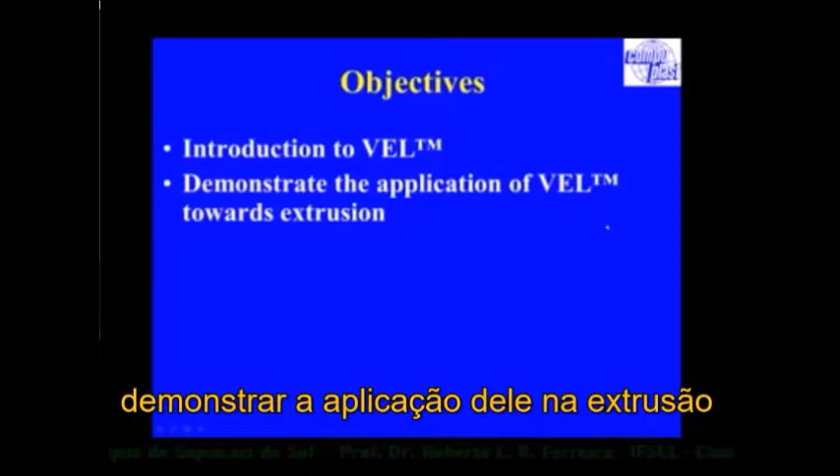This fellow here, Jerzy Wilczek, is my business partner and one of our main developers who looks after our development team over in Europe. So the objectives here are: introduction to a virtual extrusion laboratory, demonstrate the application of VEL towards extrusion, show how simulations can be used to troubleshoot and optimize an extrusion process, and explain certain observations or phenomena with the aid of simulations that would be very difficult to understand otherwise.

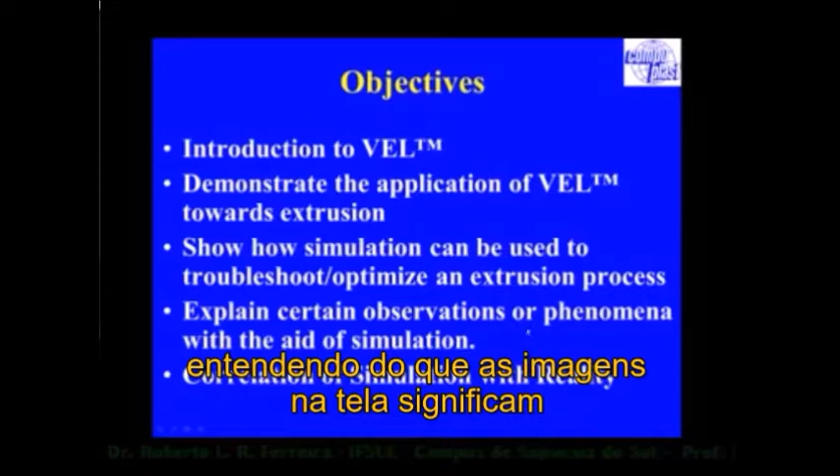And most importantly, the correlation of simulation with reality. This is the key to using simulation properly and becoming efficient, understanding what the pictures on the screen mean with respect to the reality of the process and the problem you're experiencing.

The virtual extrusion laboratory consists of these process simulations, and we have a custom one here if the particular situation doesn't apply. In reality, the virtual extrusion laboratory consists of about 12 modules, and the following parametric modules are going to be offered through Polymer Ohio. These will be the material module, which has the material database and allows users to enter material data, fit it, and use their own materials.

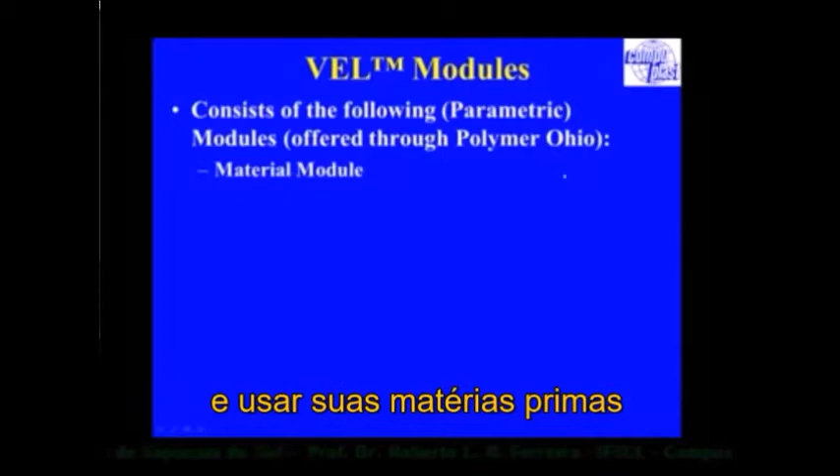The extruder module for single screw extrusion simulation, screw design and optimization. The flat die module for simulating flat or cast film dies, including feed block type co-extrusion dies. The side-fed die module, for crosshead type dies for annular coating or cable and so forth. The spiral die module, which is a spiral mandrel distributor, typically used for the blown film process, but also found success in pipe, tubing, and even blow molding.

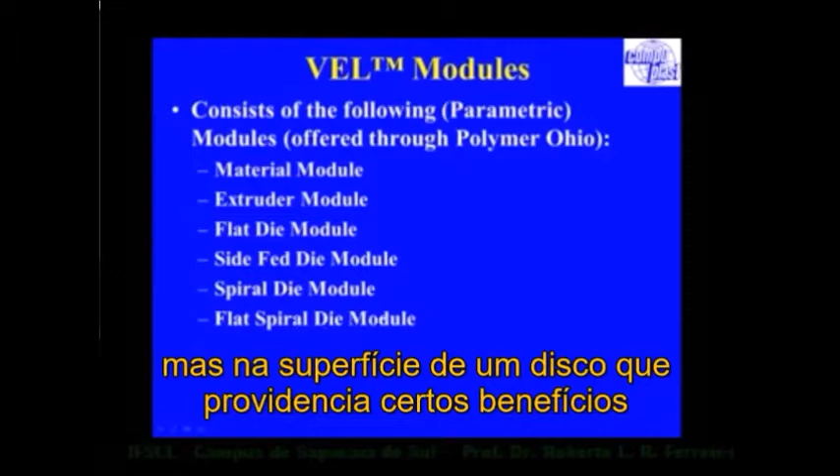And the flat spiral die module is something relatively new. It's used for distribution systems similar to the spiral die module, but on the surface of a disc, which provides certain benefits, particularly in multi-layer co-extrusion dies, over 5 layers. And of course, we have the multi-layer module, used to analyze and design co-extrusion systems where you have layers of multiple polymers.

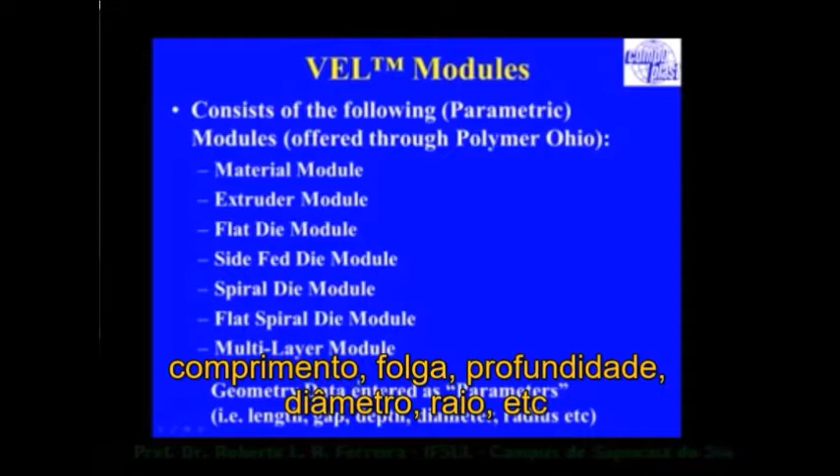These modules were selected because they are really the easiest to learn and use, since the data is entered as parameters such as length, gap, depth, diameter, radius, etc. And the calculations are mostly based on a control volume technique, which is accurate but also very fast, so you can be much more efficient in your calculations.

Now, the Virtual Extrusion Laboratory also has additional modules which are finite element method based. These are our profile die module, our 2D FEM module, and our 3D FEM module. So this is fully 3D and fully 2D calculations, and these require you to create a grid and so forth.

We also have a chill roll module and a cooling module, and we may be adding the chill roll module to the polymer portal because I think that one's also relatively easy to learn. The cooling module is still based on finite element analysis, meaning we can build the geometry within the module, but that's rather inefficient.

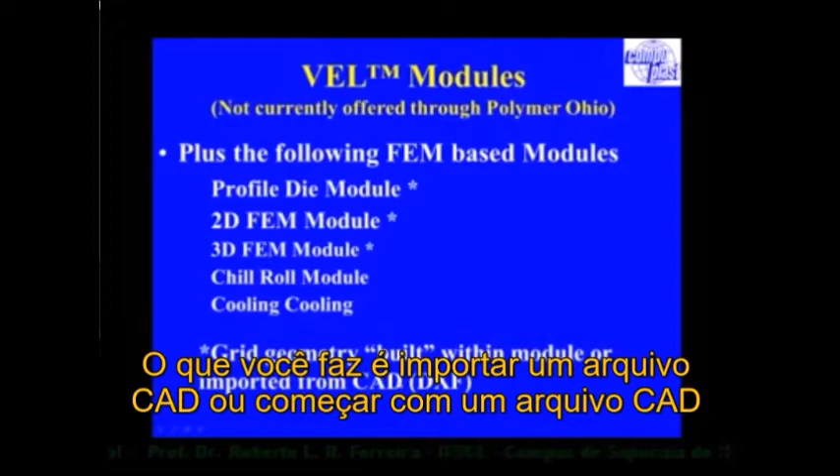Rather, what you do is import a CAD file, or start with one, create a mesh, and then import the mesh to perform the calculation. Unlike the parametric modules, which give you answers on the order of seconds or within minutes for solution time, you're looking at many minutes up to hours in calculation time for finite element type modules.

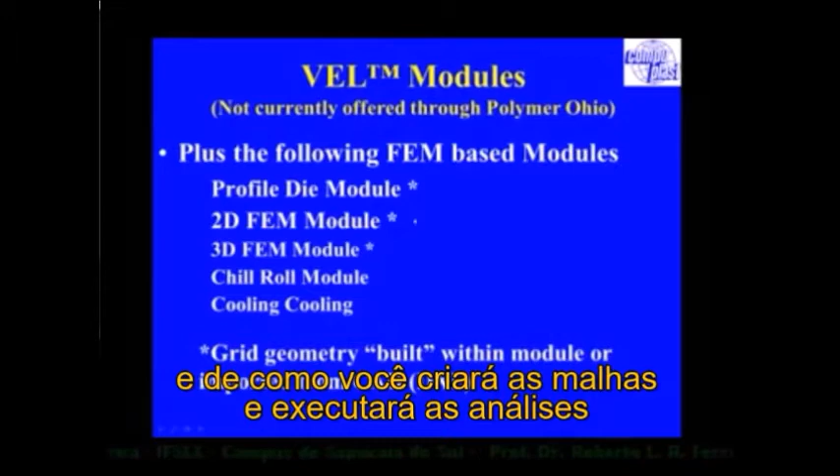Perhaps not with 2D FEM, but it does require a little better understanding in how you're creating the meshes and performing the analysis. So generally, these modules will require more training, and we may eventually add them to the polymer portal, depending on requirements and user demand.

So I'd like to begin with the Virtual Extrusion Laboratory extruder module, which is applicable to just about everybody in extrusion because they generally start with an extruder. It's used to simulate single screw extruders and optimize screw designs.

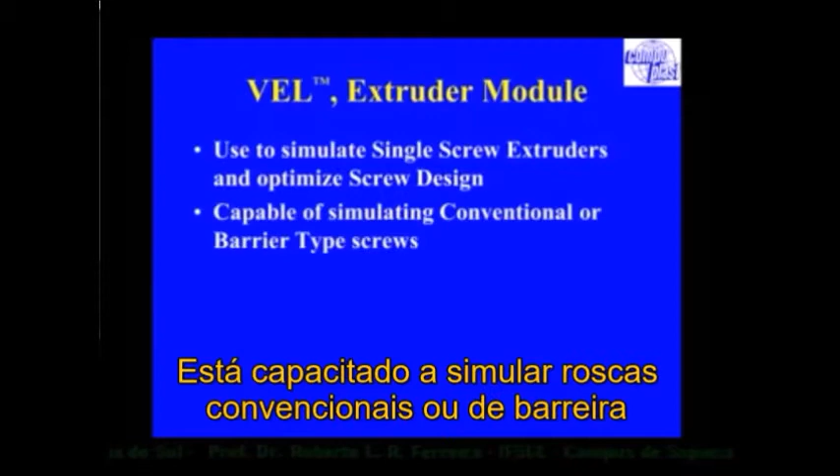It's capable of simulating conventional or barrier type screws with multiple flights. It includes various mixing sections such as the Maddock mixer, fluted mixer, spiral fluted mixer or Egan mixer, pineapple type mixers, blisters, etc. It's been applied to thousands of screw designs worldwide, so it's a tried and proven simulation module.

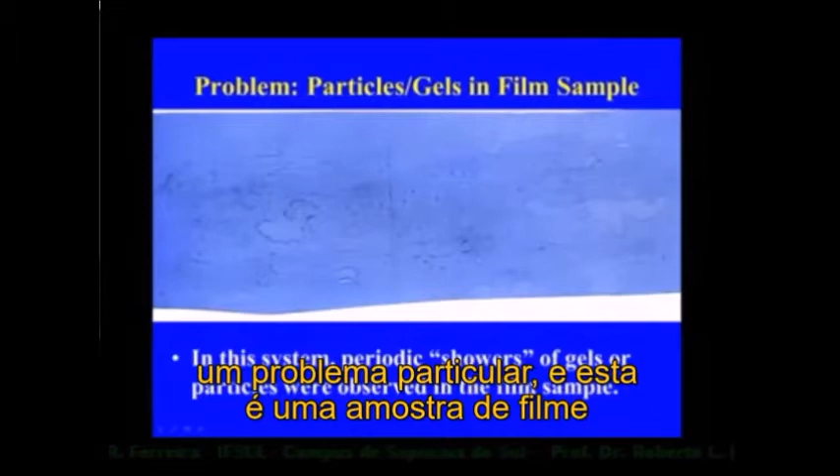What I'm going to show you is how we would use it to analyze a particular problem. Here, this is a film sample that experienced periodic showers of gels.

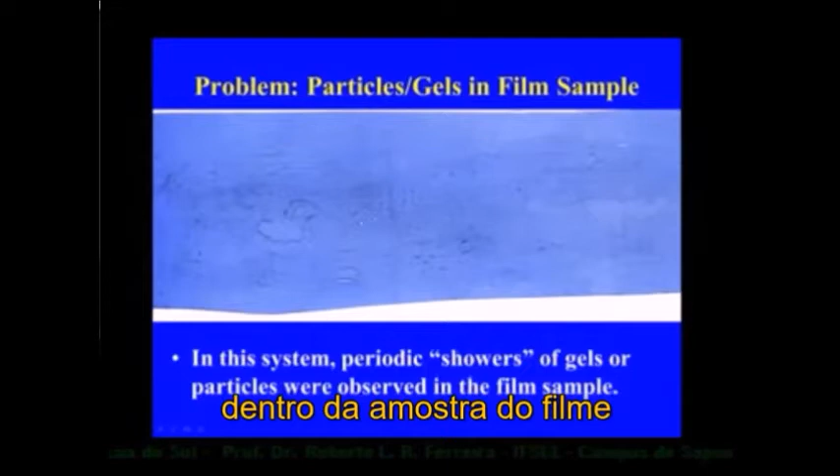As you can see here, there are little particles in the product, and these would happen periodically. You would go along fine, producing good product with uniform color and no defects, and all of a sudden you would get a shower of these blemishes and imperfections inside the film sample, and the customer came to us and asked if we could help determine what the problem is.

Typically, whenever you have something periodic—the extrusion process is supposed to be steady state—we search for something in the extruder screw. It doesn't necessarily always have to be at that point, but that's the first place we look. The first recommendation is to actually pull the screw and take a look at it.

In this case, here's the extruder screw that was used on that process. You can see immediately the discoloration in the first half of the screw. There's much higher discoloration, whereas in the second half, the screw is relatively clean—you can see the chrome polishing on it.

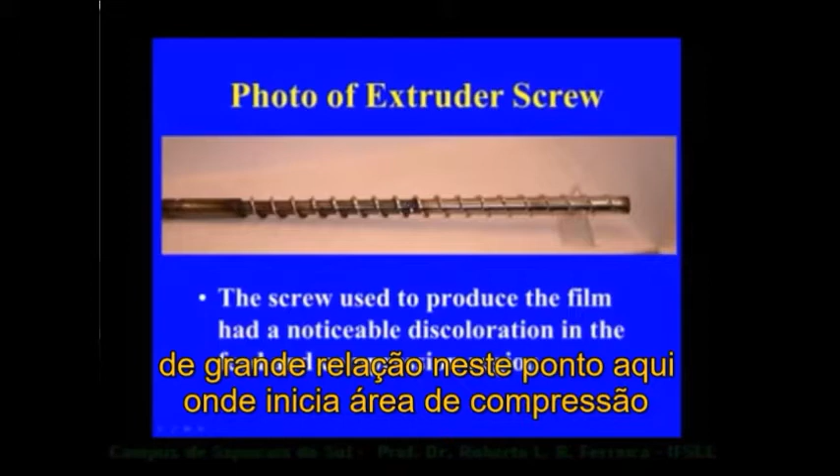In particular, if you notice, the discoloration is particularly high right at this point here, which happens to be the compression area of this particular screw. So just a little background, and I don't know how well you're going to be able to see these videos.

But these are some videos from a glass window extruder. The flow direction is in this direction here, so from right to left on your screen. Here we have an extruder screw, and the feed section is right up here somewhere, so we have pellets coming in and getting compressed.

This is what we refer to as the solid bed. As the pellets get compressed, they form a solid bed. Then somewhere right here, you'll start to see a little bit of melting—it's more clear over on this screen, the melting.

That clear area where you can see the screw doesn't mean that it's empty. When the polymer melts, because it's amorphous, it's clear, so you can see right through it, and you can see the root of the screw. Also, here you can see the flights on this side, but over here you see a little bit more part of the screw, and that's the melt pool that's being generated.

That material continues to melt, and the solid bed continues to get narrower until ultimately it disappears. Now let's zoom in a little bit on another window here. So here we see the solid bed, and I'll just pause it for a second here, right there.

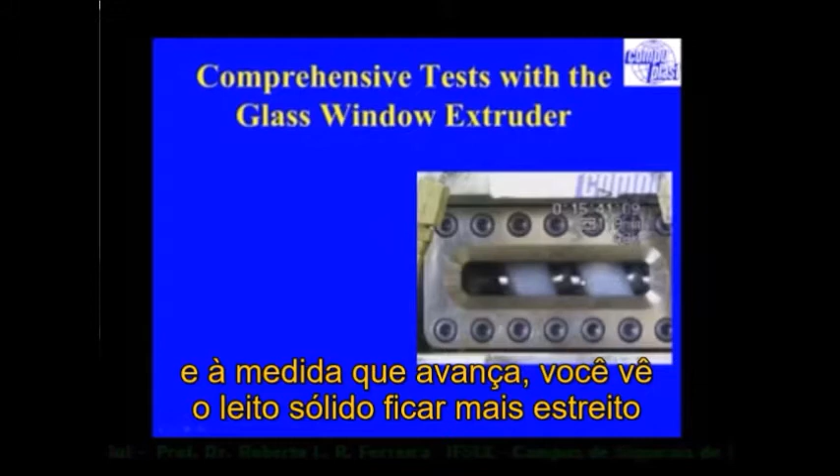So here's the solid bed, and here's the melt pool in the screw channel. As you proceed along, you see the solid bed gets narrower, and the melt pool, of course, gets wider to accommodate the molten polymer.

Over here on this side, what we'll notice is that the solid bed is discontinuous at some points—you can see it disappears. Now let's zoom in on that side of that particular slide.

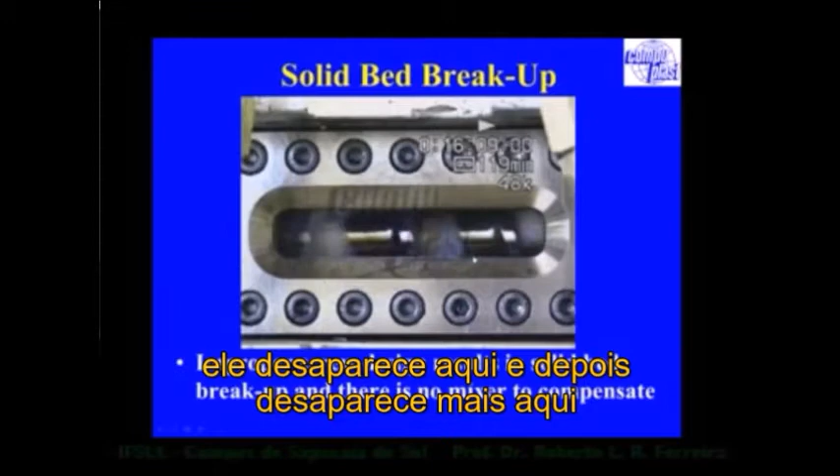So here it is, and I'll pause it for a second so you can see. You can see that the solid bed here is almost gone, then it appears again. There it disappears, and then it disappears over here again. So this solid bed has broken for some reason, and this particular screw has no mixer.

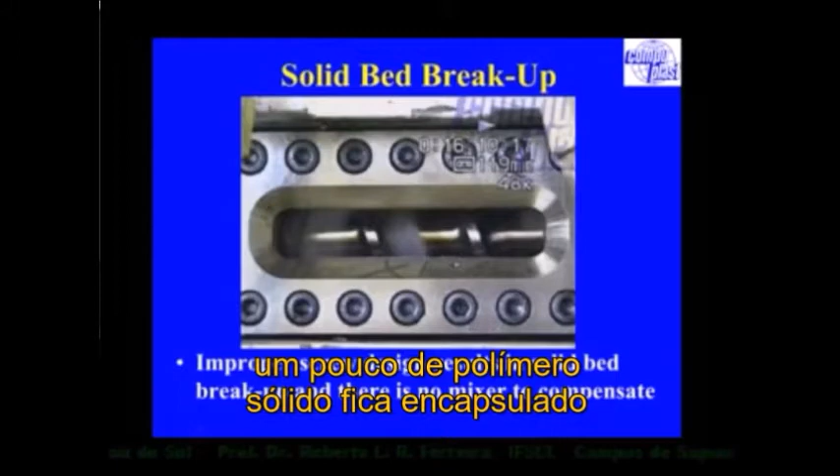To compensate for this breakup of the solid bed. Once the solid bed breaks, the pellets get encapsulated in molten polymer, and now they don't experience the shear at the barrel surface that results in melting. As a result, they just have to melt by conduction, which is very low because polymer is an insulator.

So one of the parameters we analyze in the simulation is the so-called solid bed ratio. This is simply the ratio of the solid bed width versus the overall channel width. As you can imagine, the solid bed ratio starts at a value of 1 because everything is solid back in the feed section, then gradually reduces down to 0 prior to the end of the screw, or it should anyway.

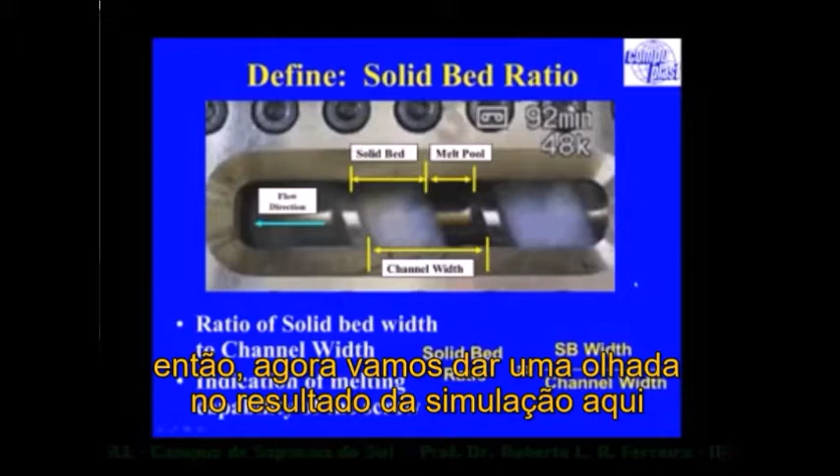Now let's take a look at simulation results here. We simulated this particular screw, and I'll lay the screw down on this graph so you know what we're analyzing. This is the relative distance along the screw from 0 to 1, and this is the graph of the solid bed profile, which starts off at a value of 1.

In the beginning of the screw, in the feed section, and then at some point the material starts to melt. So you see the solid bed is reducing gradually as the material is melting. And then we notice something strange in this particular screw.

Right about here, which coincides with the dark area on the screw, the solid bed actually starts to increase again, and you think, well, this is strange. Why would the solid bed be reducing and then start to increase?

Well, what's happening is that the solid bed ratio is a linear measurement. That is, it's based on the width of the solid bed relative to the width of the channel, but it doesn't take into account the compression.

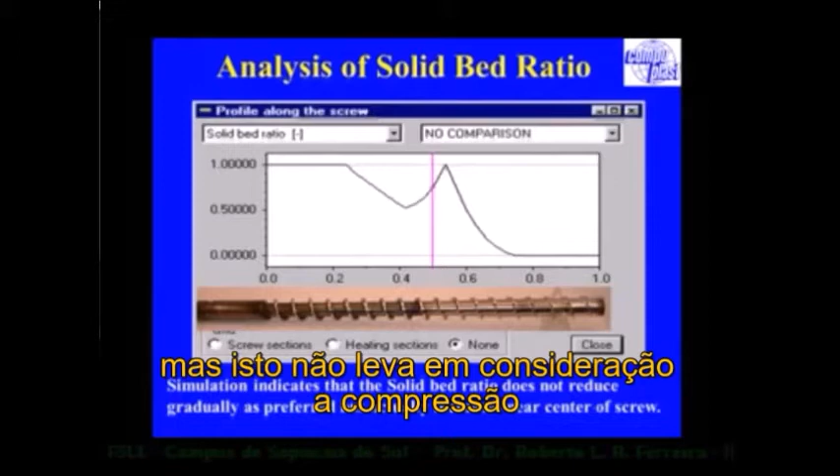In the screw here, as you can see, the feed channel is deeper than the metering channel, and somewhere in here we have the compression. As you compress and squeeze the solid bed between the root of the screw and the barrel, if you are compressing faster than you are melting, then you will spread out the solid bed.

And so that's what it shows here - the solid bed starts to spread out. We know now from experience that whenever we see a result like this, where the solid bed profile isn't reducing continuously down to 0 and starts to increase, that we are putting more force on the solid bed and compressing it faster than it will melt. That's a condition where we rupture the solid bed and create solid bed breakup, right?

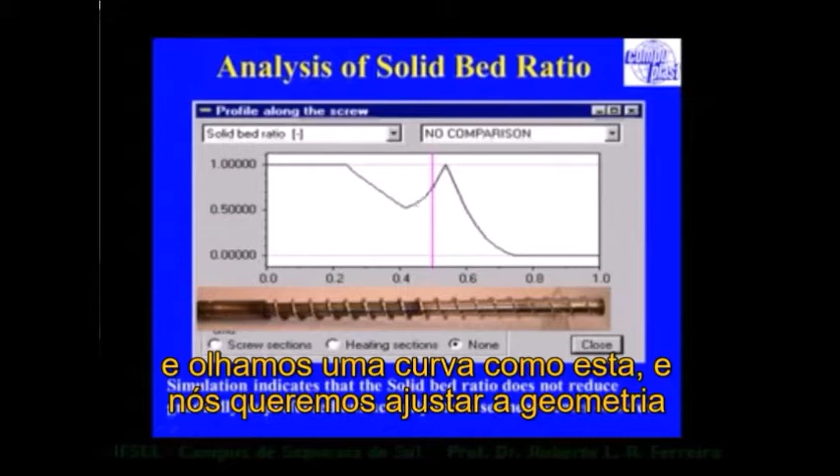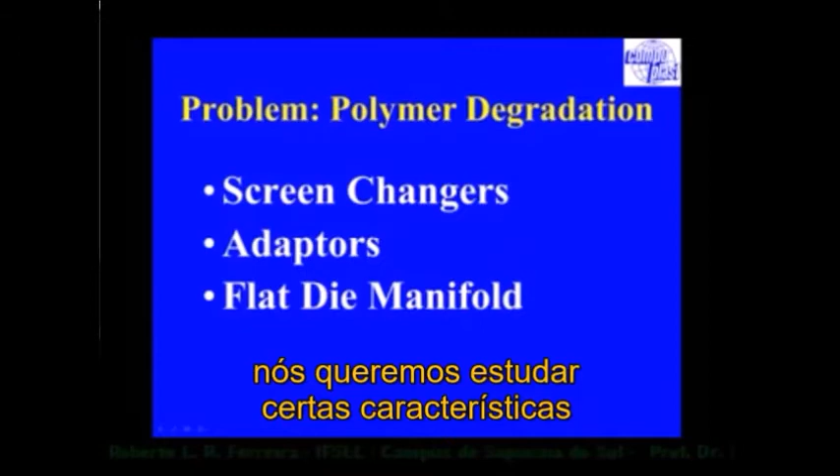Moving on to the next example, I want to talk about screen changers and adapters, and I'm going to talk with respect to a flat die just because the geometry is easier, but this applies to pretty much all dies. Whenever we analyze the flow in these sections, we want to study certain characteristics in the flow field to see whether the geometry is acceptable.

So for example, at the end of the screw we have a screen changer, and quite often when people add screen changers to extruders, the screen changers typically require some distance prior to the breaker plate for the pressure in this area to load the seal section. There's usually a sealing section in here, and it requires some distance to create enough force to create the seal.

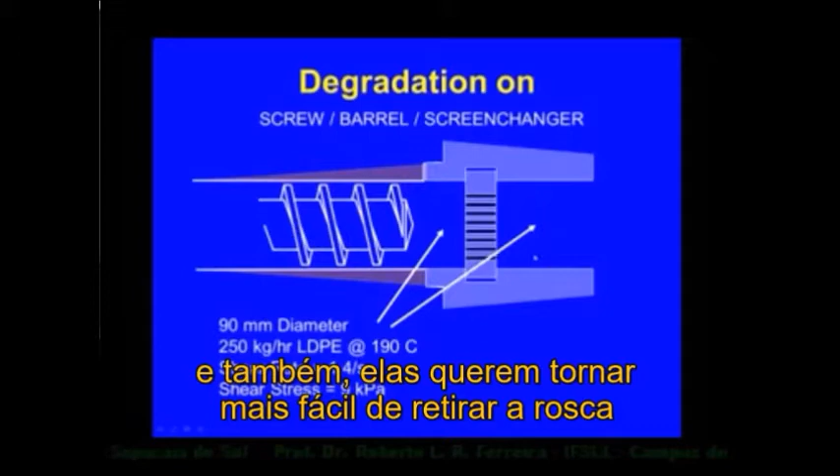And they don't accommodate for the length of the screw, so they have a large empty area in here. They want to make it easy to pull the screw if they ever need to, so they don't have a reduction in volume here.

And so if they wanted to pull the screw, they just index without a breaker plate in there, and then they can pull the screw right through the screen changer.

However, if you do a simple calculation here, you'll see that the extruder sizes, the bore diameters, are so large relative to the flow rate that you're not going to get a very good flow characteristic. And just to explain that a little more, I'm going to introduce you to the wall shear stress.

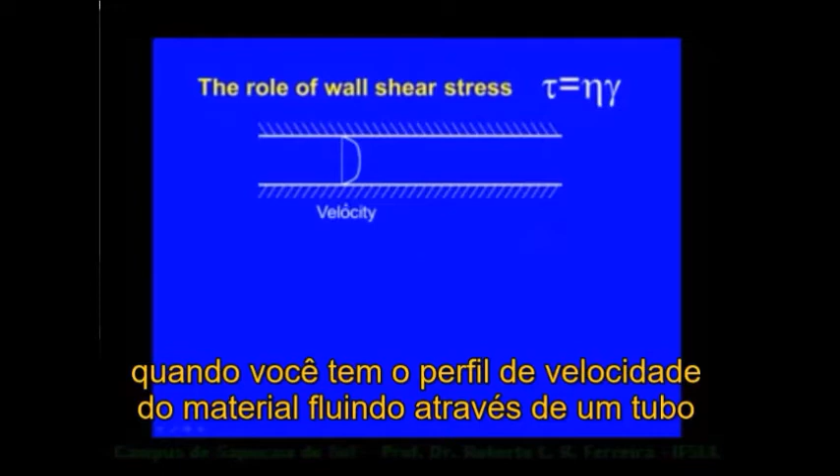The shear stress on the wall is equal to the viscosity times the shear rate. This is a very critical parameter in having good performance in the equipment. When you have some velocity profile of material flowing through a tube, an annular gap, or any flow channel within a die, you end up with a certain shear stress profile in the system. The shear stress is minimum where the velocity is maximum and is maximum at the wall.

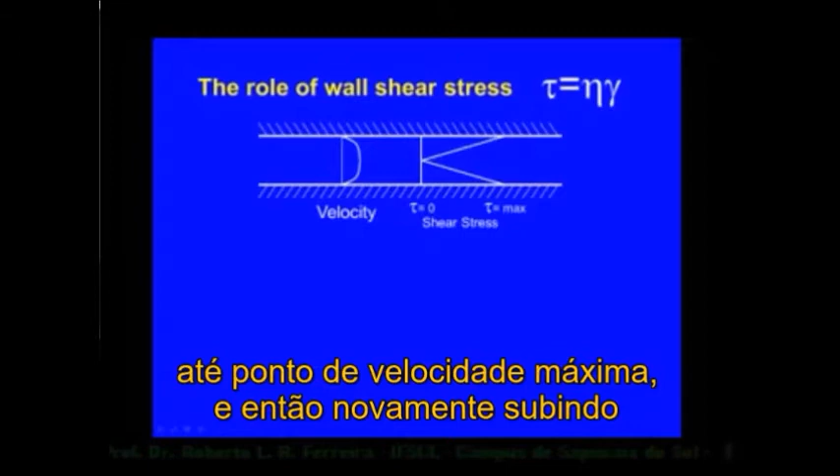So you have a graph of shear stress. If this was zero here, you would have a maximum shear stress at the wall going down to zero at the high velocity point, and then again up to maximum stress on the other side.

It's this shear stress that is used to keep the surface clean. It's what determines the self-cleaning characteristic of the wall, because this shear stress actually scrubs the surface. And the big question is, what's high enough to keep that surface clean in my equipment?

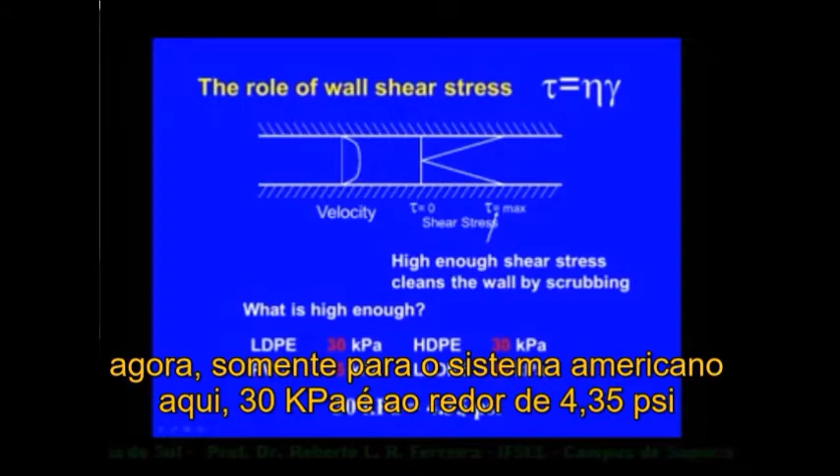Well, through many years of experience and studying different pieces of equipment and conditions, we've figured out that a critical value for shear stress is in the neighborhood of about 30 kilopascals for polyolefins, and maybe 35 kilopascals for PVC. Now, just for your U.S. numbers, 30 kilopascals is equal to about 4.3 psi of shear stress.

So once you understand how important this value is to maintaining a clean surface, what happens if you don't maintain a high enough value is that you actually get a layer of polymer not moving along the surface, just being stagnant. And eventually it will degrade.

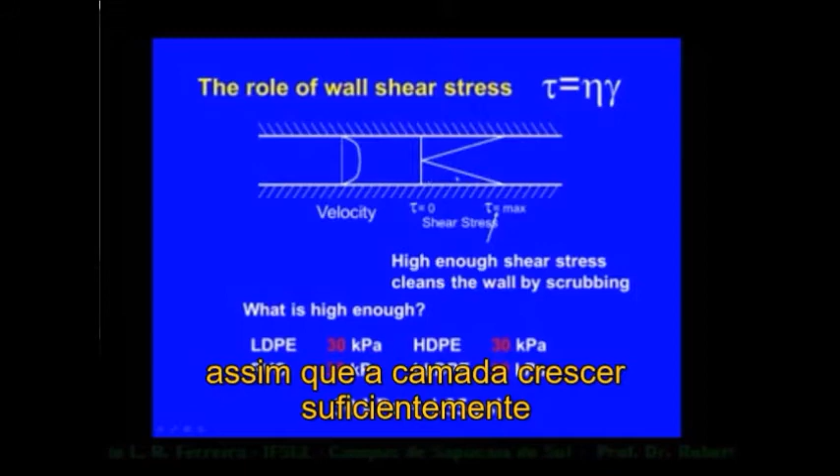Once that layer gets big enough, it will start to get scrubbed by the material flowing in it, or if you do a heat change or something that disrupts it, it'll come up and appear as a gel or some degraded material in your product. So we want to avoid any condition that has this low shear stress.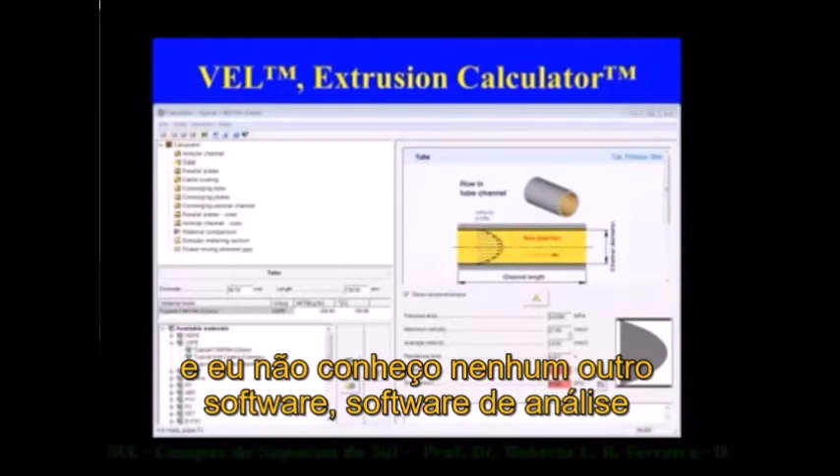Now, this is one of the unique features of the virtual extrusion laboratory, and I don't think any other analysis software for extrusion has anything like this. We have checking parameters for each polymer group, and the checking parameters are used within the modules to highlight potential conditions where there are problems or potential problems in the system.

So just to demonstrate how this works, I'm going to bring over the software here. This is kind of a live demo, and I'm going to go through the design of an adapter. So you want to design an adapter, let's say, to convey 150 pounds per hour of polyethylene at 390 degrees Fahrenheit. And let's say I'm a junior engineer. Our adapter length is 16 inches.

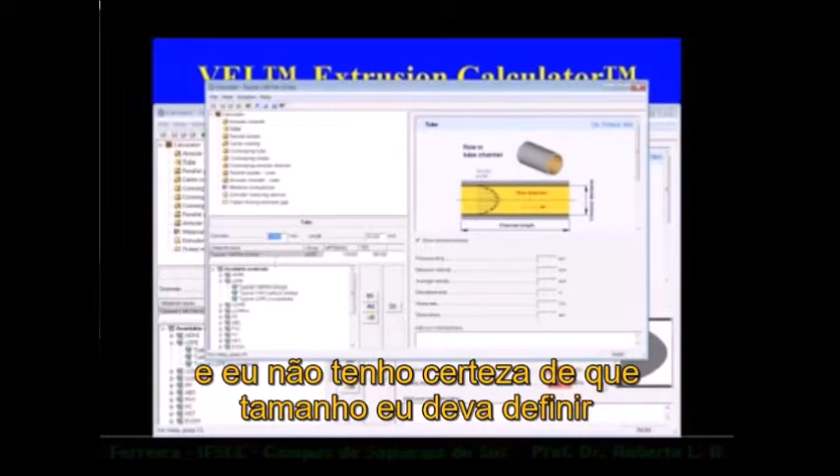And let's say I'm a junior engineer and I'm not sure what this size should be, so I pick a 2-inch adapter, and then I perform a calculation. Well, the software here will show me the velocity profile, the pressure drop through that adapter, 51 psi average, maximum velocity, residence time, but it'll also highlight two numbers, the shear rate and the shear stress.

And when I put my mouse in that box, it'll pop up a little window saying the shear stress should not be less than 4.35 psi. With low shear stress, the scrubbing force on the wall may be low and the material can degrade.

Now, that is a warning to the user saying, hey, your design condition is not very good. So the user can choose to go back and say, oh, let me try 1.75 and perform the calculation again. And we say, oh, it's still not enough, the values are still low.

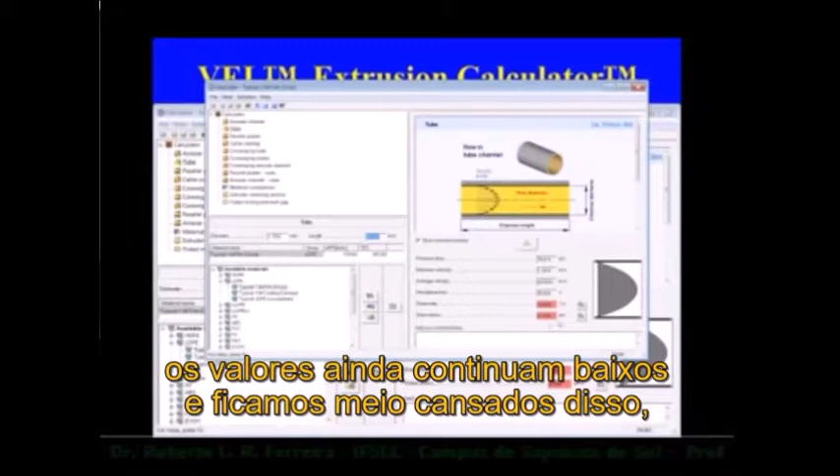And we got kind of tired of this, so we added this nice little button right here. And when you click on this, it automatically changes this to the optimum channel size that avoids the problem with the minimum shear rate and shear stress.

And now this is a kind of odd drill size, so we would probably go 1.125, or the 1 1/8, for our adapter size. So the shear stress gets a little bit higher, shear rate's a little bit higher. And of course our pressure drop is higher through our adapter.

We got about 260 psi through that adapter. But the flow conditions are such that we're not going to have stagnation of the material or channeling of the polymer through that adapter. So the extrusion calculator is a very, very powerful, quick tool for sizing channels and checking to see if part of your degradation problems are not properly sized channel.

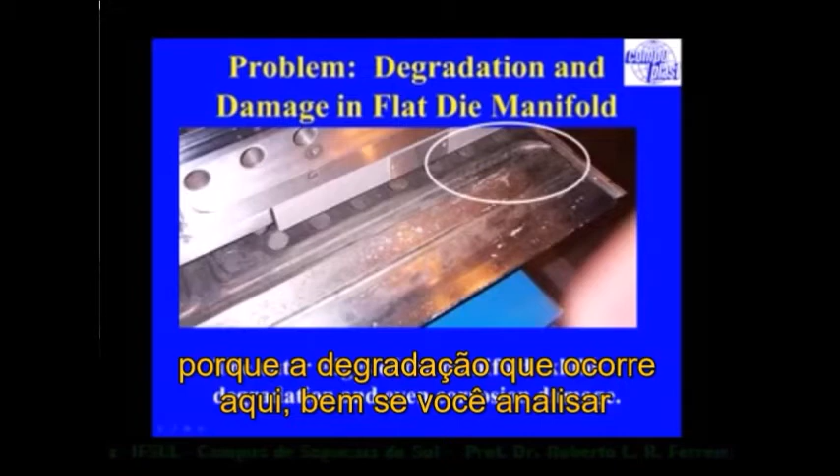Well, if we analyzed this geometry, this is the flat die module. This is a result from that module, and what I'm showing is the shear stress on the surface. This is actually the way we determine the critical values for shear stress for a particular polymer.

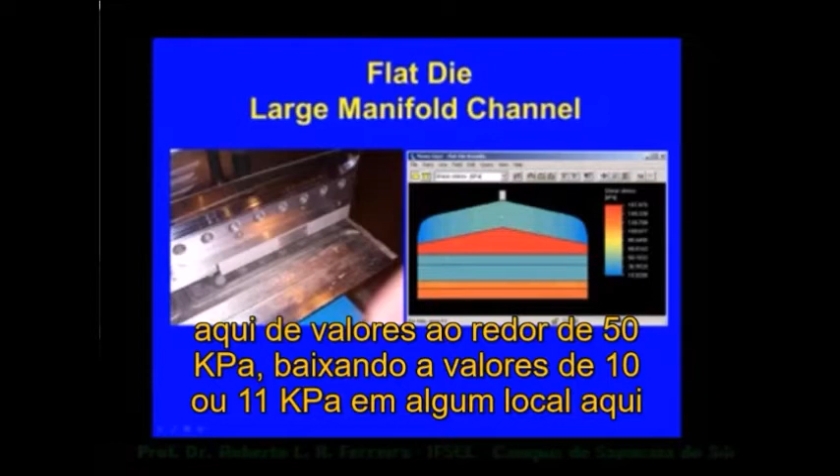Here, the shear stress you can see in the manifold, that would be this section right in here. This shear stress in this manifold is varying from a higher value here, somewhere in the neighborhood of about 50, down to a value of about 10, 11, somewhere down in here.

And so when we graph this result, we can get a graph, something like where you see the degradation matches the low stress area. But when we graph this, we get a graph of the stress across the width of the manifold. And so what we do is we go back to a certain distance and say, okay, the degradation appears to start right about this point.

And we can do the same thing on the graph, we can move back to about that point on the graph, in the position of the graph, and we say, what's the stress level right there where we see that it's still acceptable? And we find the value here of 30 kilopascals.

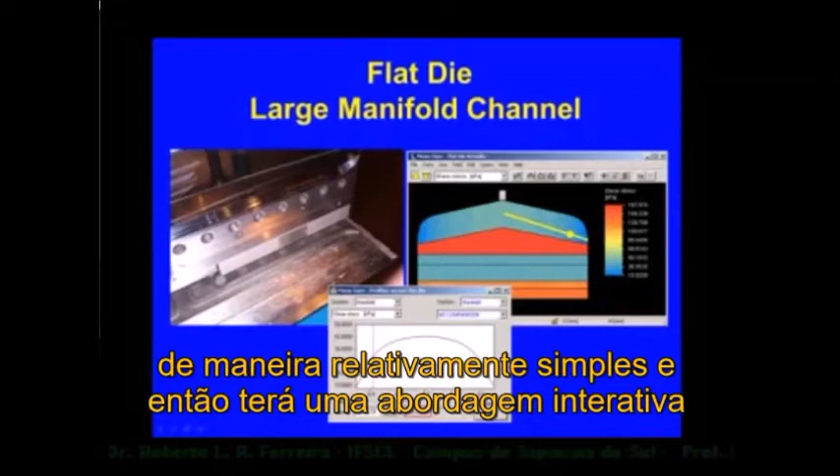So we say, okay, we're going to say that for PVC, we're going to use a value of 35 to give us a little bit of leeway, and that in the next die that we manufacture, we're going to design this manifold so that the majority or virtually all the manifold has a shear stress above this value, or 35 kilopascals, to avoid degradation. And so when you have the simulation, you can perform those calculations relatively easily and then have an iterative approach to doing those types of calculations.

So for polymer degradation, one of the main parameters that we need to address is the shear stress on the walls. And this has to be adequate to avoid stagnation of the material and degradation. And this means proper channel design and sizing, and also proper operating conditions.

The best designed channel, highly polished and designed for 200 pounds per hour, will not be adequate if you're only running it at 100 pounds an hour. So you have conditions where people say, you know what, yeah, design it for 200 pounds an hour because I'm going to get a larger extruder later, but for now I can only run 100 pounds an hour. Well, that doesn't do you any good for now, because you're going to have stagnation problems and degradation.

So with the virtual extrusion laboratory, you can calculate those things quite easily. Now here I want to demonstrate a particular problem that was rather challenging and probably almost impossible to determine without the use of simulation.

This demonstration here will use the finite element software to analyze the problem and understand it. Once we understand it, then we can use our control volume or spiral die module that's on the portal to design equipment and avoid the situation, because we can correlate this observation to that module.

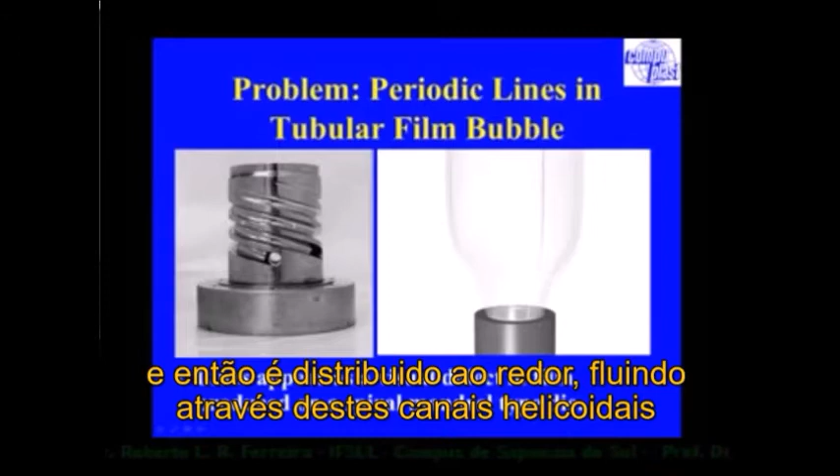And this is done on a spiral mandrel die, which is basically a die that has helical grooves cut in the surface to distribute the polymer. The polymer comes into the die through these ports and then gets distributed around by flowing through these helical grooves. Well, these dies, these lines that we observe are very localized, thin sections that repeat around the circumference equal times as there are spirals.

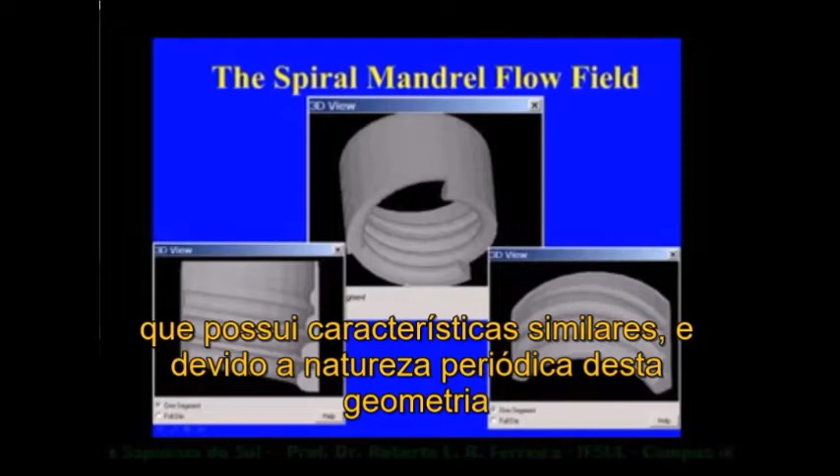Now here's a geometry of a die. This isn't actually one of the real geometries because they were proprietary, but once you understand the problem, you can create it almost on any geometry. So here I've made a die that has roughly similar characteristics, and because of the periodic nature of this geometry, we only need to analyze one section between ports.

So you can see here that we have basically in this die 3 inlets, and so you can see that this one section repeats basically 3 times.

So to make life easy, we always take advantage of any periodicity. We take advantage of any symmetry. Anytime you're doing calculations, especially finite element type calculations, where you need a lot of memory, a lot of computer time, you want to minimize that, so you take advantage of any sort of symmetry or periodicity. That's what we do here.

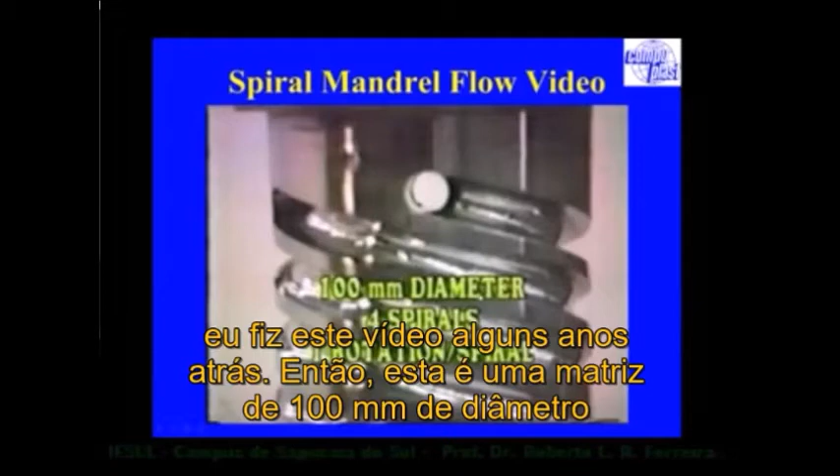And just to give you a better idea of the flow field, I did this video a few years back. So this is a 100 millimeter die with 4 spirals, a 4-inch diameter die.

It's got 4 spirals, and I set it up on a rig where I could pump some silicone fluid through it. I used a clear acrylic body so we can see what's happening.

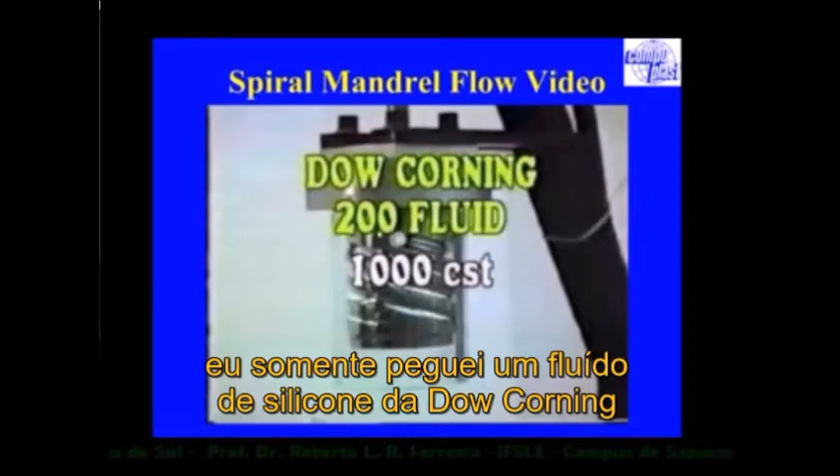And there's a 1 millimeter gap between the ID of the clear acrylic body and the OD of this mandrel, which is consistent. So I just took some Dow Corning silicone fluid and ran it through, and you can see the material coming through there and flowing around.

And coming out. If everything's designed right, you get a uniform annular flow at the exit. So you can see the material flowing in, and then as it flows around, the gap between the mandrel and the body allows it to leak out, and you have the uniform annular flow.

So that's the flow field that we're studying. And now here is a result from a finite element simulation.

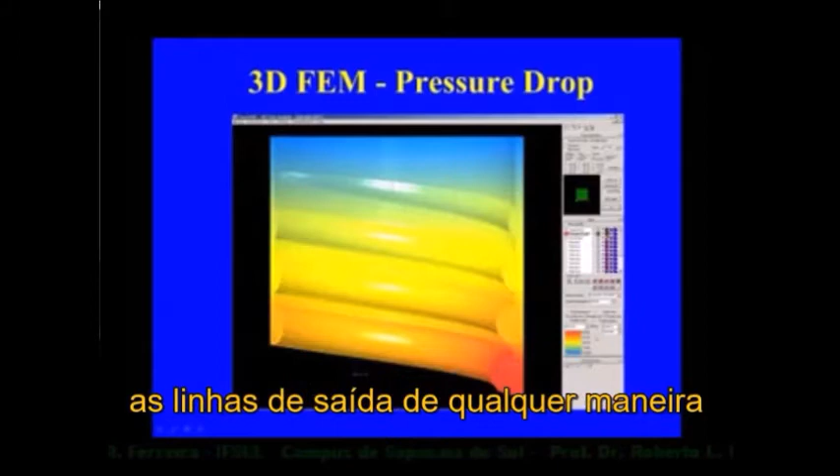So you can see the finite element mesh, the outlines of it anyway. This is showing pressure, and the pressure contours look fine. There's nothing particular here that will indicate a line being produced on this product.

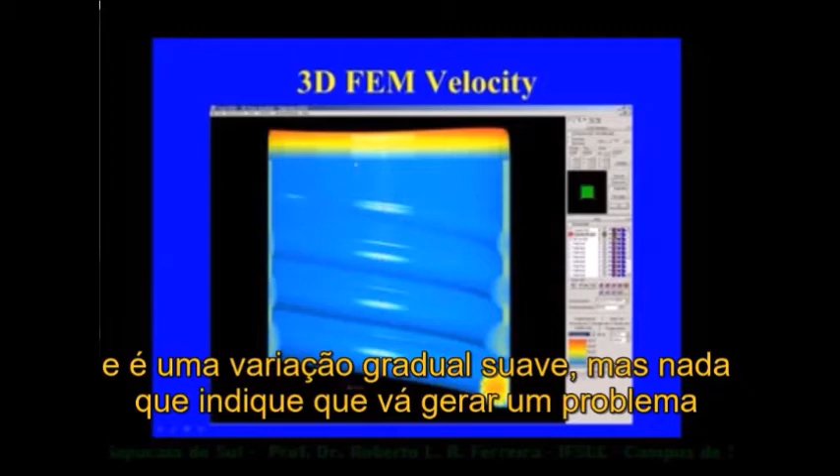We see slight variation in the velocity, and it's kind of a gradual variation, but nothing to indicate that there's going to be a problem with a weld line or the appearance of a line again.

And if we put two-thirds of the flow field together, now you can get an idea a little bit about the periodicity and how the material flows. There's a slight velocity variation, but like I say, not a lot, nothing to indicate there's a weld line.

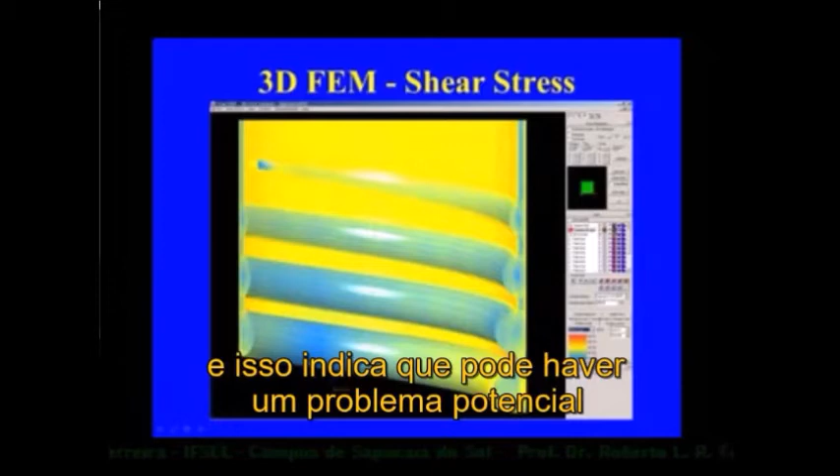Now here we show the shear stress, and the shear stress gives us the first indication of a potential problem. We see that there is a localized minimum - the shear stress is relatively high here, then it drops to blue right in here, gets slightly higher again here, and then drops again a little bit here. It indicates that there could be a potential problem in this localized low stress region.

So we analyzed this flow condition using particle path lines. This is one of the big advantages of doing a 3D finite element analysis - you know the velocity everywhere in the flow field, and you can study path lines, kind of similar to streamlines, but in 3D, where you can say, okay, I'm going to start from here.

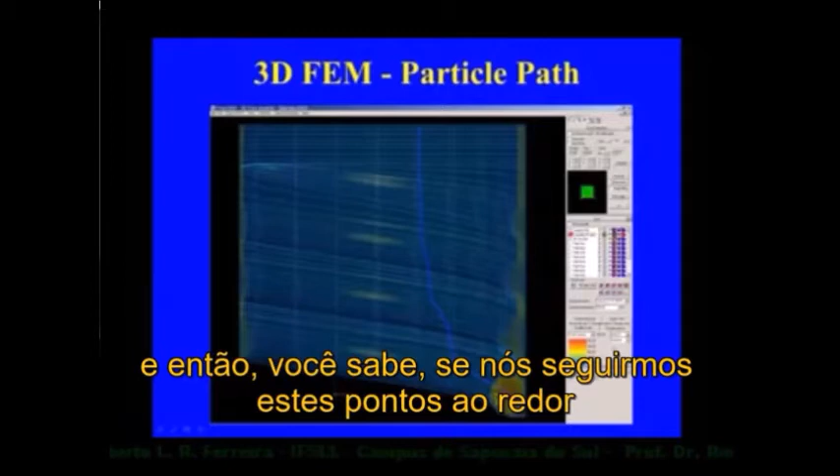Now what we're going to do is put a series of points around the inner wall of the starting point. If we follow those points around and then connect the dots at the exit, we'll have an idea of where the material from this inlet ends up at the die exit.

So here now is two points. There's the one beside it, flows a little bit further. We'll go through the next one, goes a little bit further. Then we put the next point, we see that it doesn't go much further actually. It comes out a little bit sooner, ends up almost on top of the other one.

Next point here, this one from over here goes a little bit further. Next point from up here comes back, comes out a little sooner. So you see we're not getting much flow out in this area.

Now this point right here, it comes out, almost comes straight up out of the die, close to the entrance area. And this one's the most interesting one. This one comes out quickly and goes out this area.

Now because of periodicity, another one appears from this side and ends up coming up here. And we put another one right out here. We see this one does the same. It comes out this end and enters from the other side and shows up here.

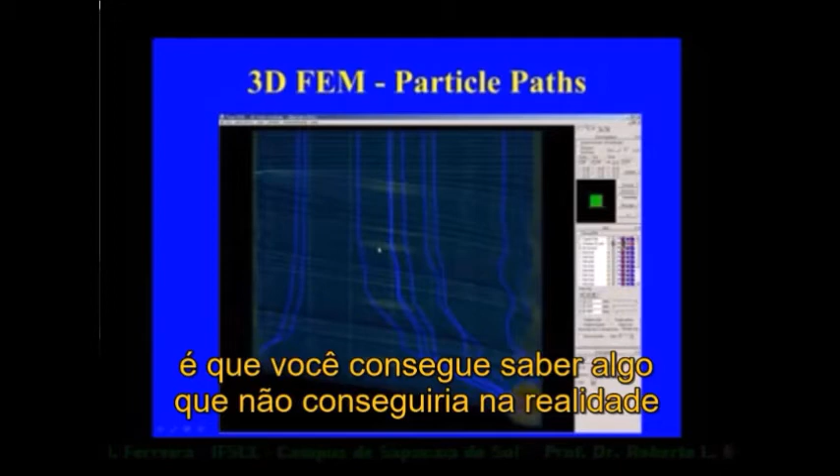Now the really cool thing about finite element analysis and path lines is that you can do something that you can't really do in reality. In reality, we could set up a rig and inject some material here and watch it flow through the system. But in finite elements, we can do the reverse analysis. We can actually put a particle here and say, where does it end up?

So if I click there, this particle would come from here. So from this point here, where does it come from? It comes here. And if I click over a little bit further, and trace this particle back, it comes out here and then comes from this point over here.

Now it's not really coming from the same channel. What's happening is because of the periodicity, these particles are coming from the next spiral. So if you were to look at it together, this is what's happening: the material from the next channel is coming back, flowing in here, and the material from this channel is flowing up to here. We have a region right in here where the material is avoiding or not flowing in.

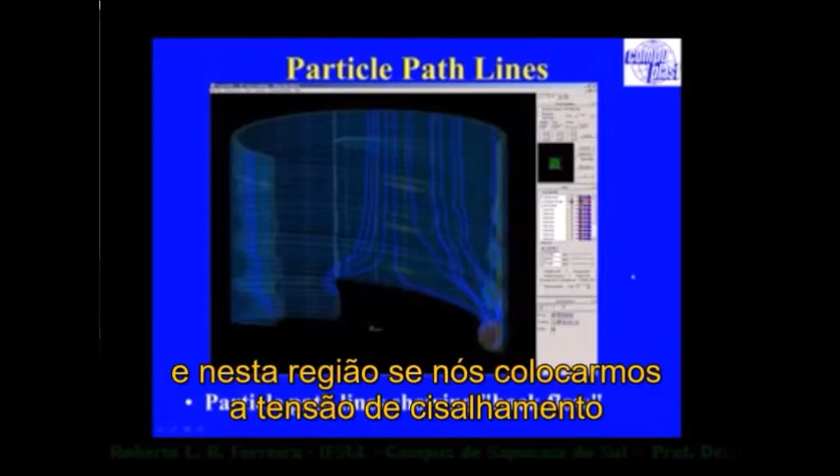And this region, if we put the shear stress on here in transparency, we see that the low stress area is the area that the particle paths are avoiding. Now if we look at it again, combined now with two of the three sections, we can see it more clearly, and this right here becomes a weld line that would appear in your final product.

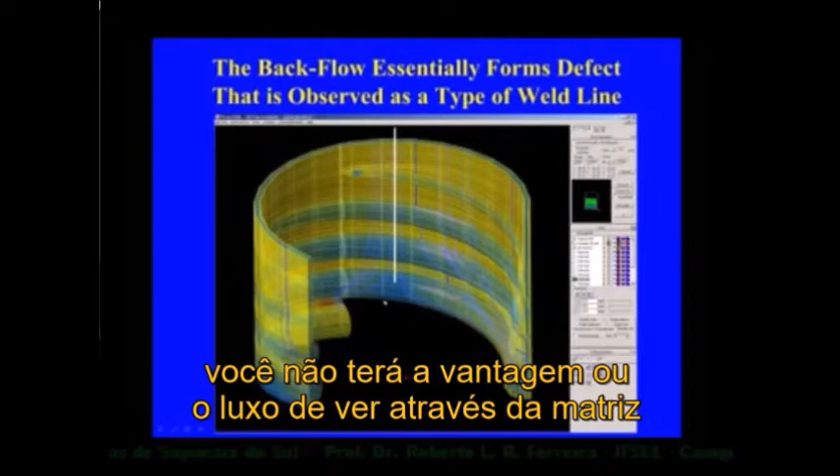Now, when you're looking at a die on the line, you don't have the advantage or the luxury of seeing through the die to actually see the particle lines and the path lines to see this. So without 3D simulation, it would be very, very difficult to solve and understand this problem.

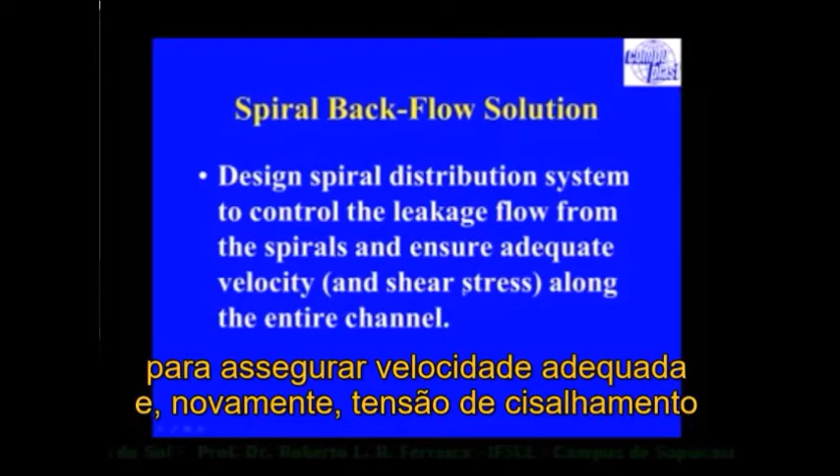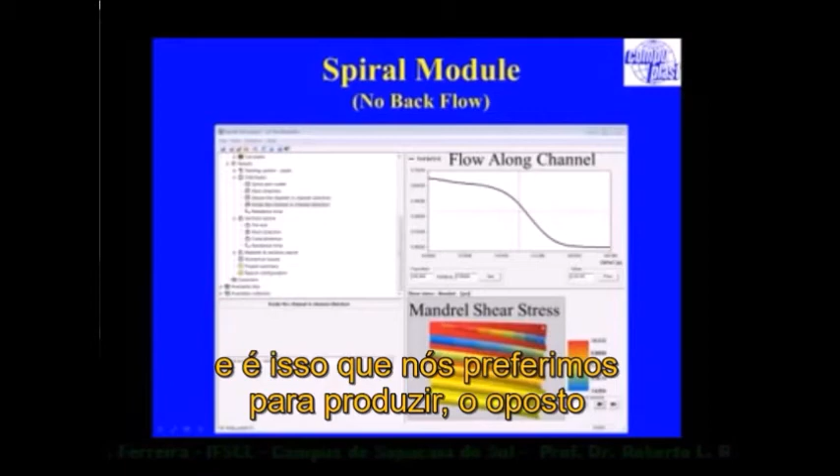A result like this, where the flow along the spiral does not drop dramatically but drops more gradually, and the shear stress on the mandrel remains relatively high for the majority of the distance. Of course, at the end it has to reduce because the flow in the channel is reducing. But this is a much better condition in the design, and this is what we would prefer to manufacture, as opposed to the previous result.

In conclusion, process simulation provides more information for correlation between process conditions and production problems. It gives you a new insight, a window into the process, so you can see the problems and understand them. Once you understand the problems and what's causing them, this leads to a more precise solution, or perhaps avoiding them altogether on a new design.

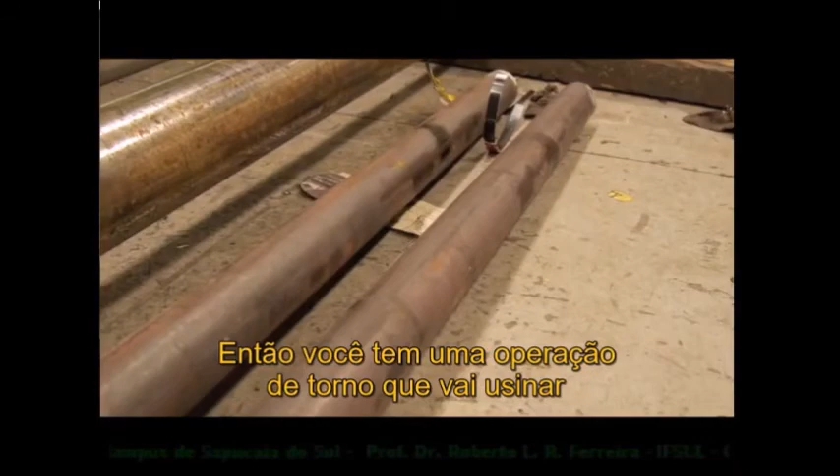So you've got a lathe operation in which you're turning that down to a precise bar, because it's just a rough piece of steel when it comes in here. We have to turn them down so they're more round, because they come in and they look like eggs, not round at all. Once it's been turned to a particular size, it goes into one of our milling machines.

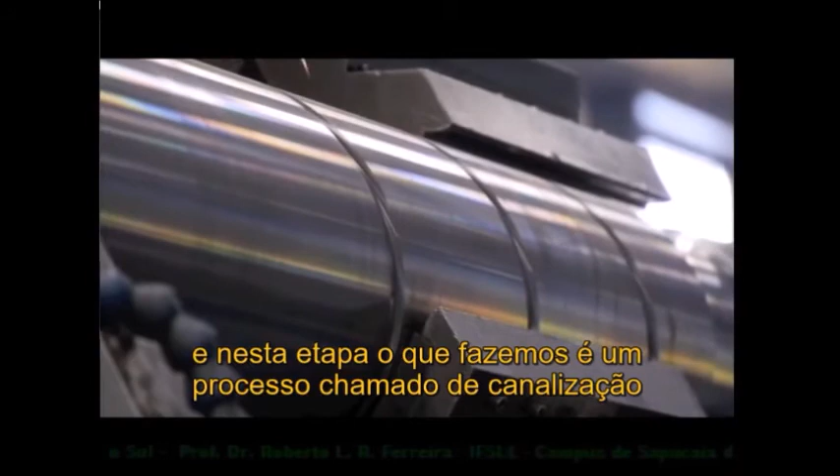At that point, we do a process called channeling. Essentially that lays a deep channel all the way down the outside diameter of that bar of steel, like a river channel, that goes down the entire length of that screw in a spiral fashion. The screw spins the parts you're machining, it turns, your cutter spins, and then it follows a lead, making a corkscrew style.

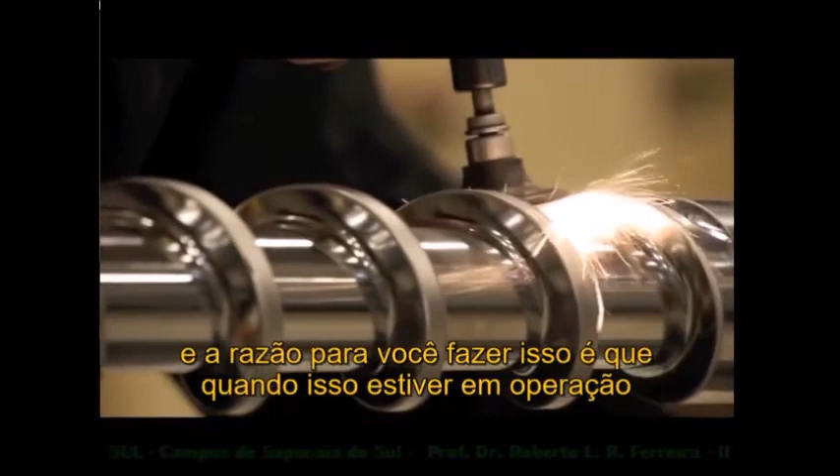We put hard-facing alloys and fill these channels, and that becomes the top of the flights on the screw. The reason you do that is because when this goes into operation melting plastics, that's a very hostile, very abrasive environment. If you didn't put carbide alloys on the surface of the flights, these things would wear out in a couple of weeks. It's really hard stuff.

We can't machine them. Once it's welded, we have to grind it down, because it'll just break cutters.

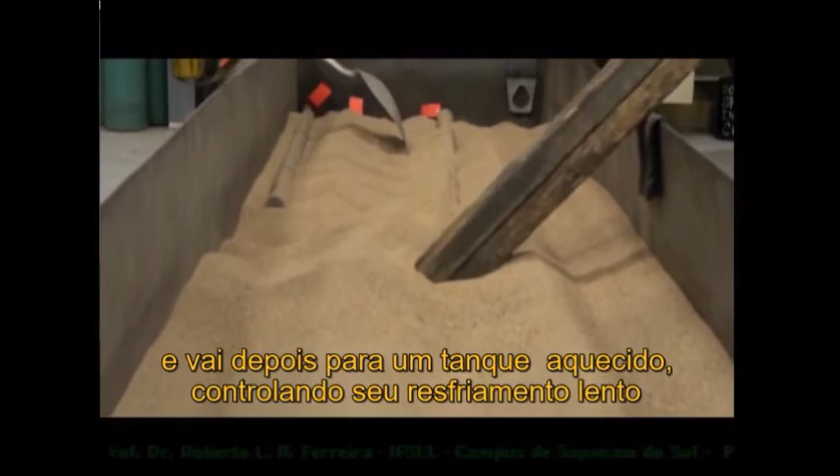So what happens at that point is it'll go into the welder, it'll be welded, then it goes into a tank of vermiculite, which will slow cool the screw. At that point it may stay in there for 2 or 3 days depending on how big the screw is. The process needs to slow cool because the weld put into the channel has a different rate of cooling than the base steel.

The weld is all uneven, and they have to fit inside of a barrel, which can only be off by hairs, like about 5 hairs on your head. The weld when it comes out of the welder could be off by 1/4 inch, so we throw them in the OD grinders. OD is for the outer diameter of the screw, and we have certain tolerances that we have to take the OD down to.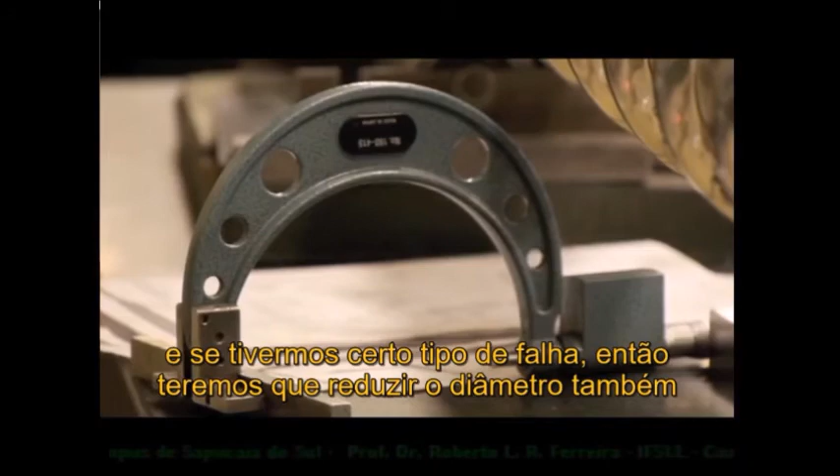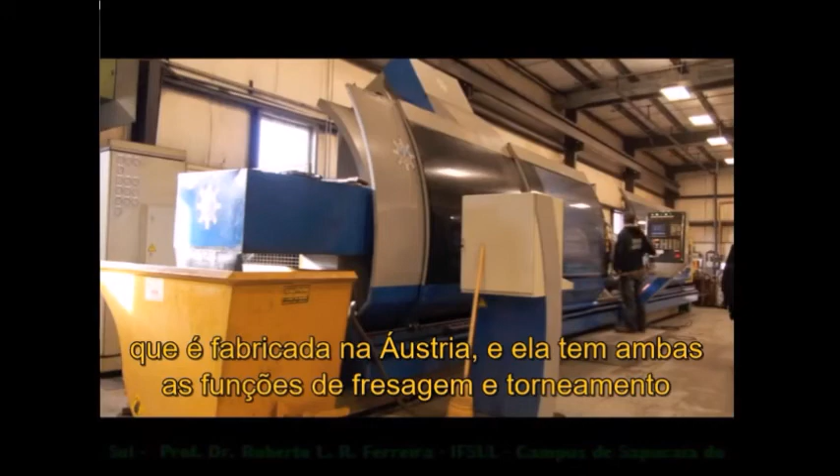Once the hard facing is welded on, we cut away the steel that becomes the channels of the screw. That's done on a very sophisticated machine, and we're the first in North America to have purchased a dual slide machine, manufactured in Austria, that does both milling and whirling. You have two different slides, and you park one while using the other, either milling or whirling, and that's how you remove the metal and create the channels in the screw.

At that point it comes out of the CNC machine and goes over to one of our belt polishing stations, which looks like a big belt sander. It starts at a heavy grit and goes down to a finer grit through that process. We're trying to take all the imperfections out of the bar steel, because plastics hate a rough surface, since they'll stick to it and then degrade. So we get a very fine polish on the screw at that point.

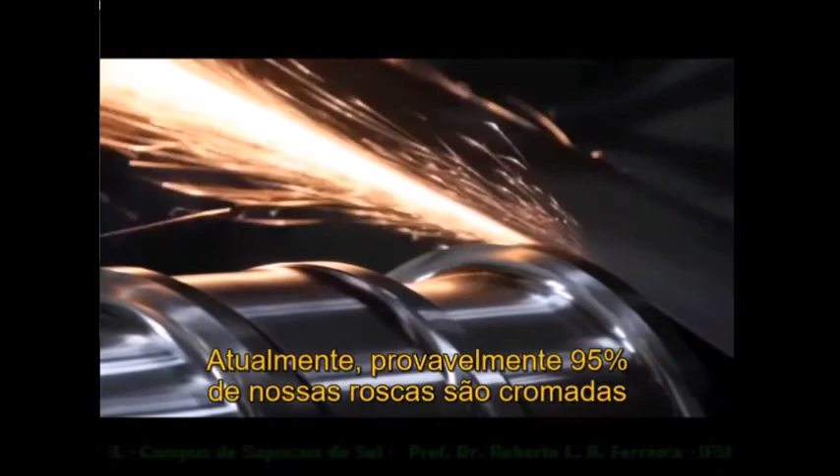Probably 95% of our screws are chrome plated, so that's the polishing process that happens right up until the chrome plating. When it comes back from the chrome plater, we buff it and final polish it. We also put the drive end on the screw. There are various milling operations that go into the fit and finish for the actual machine it will be going into.

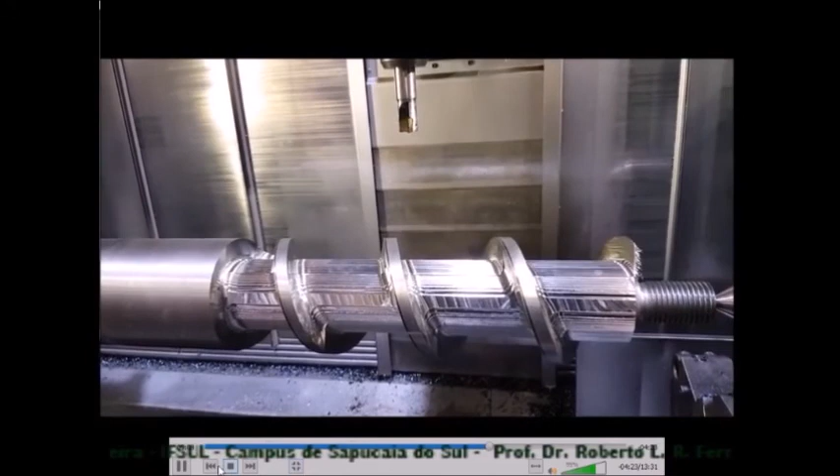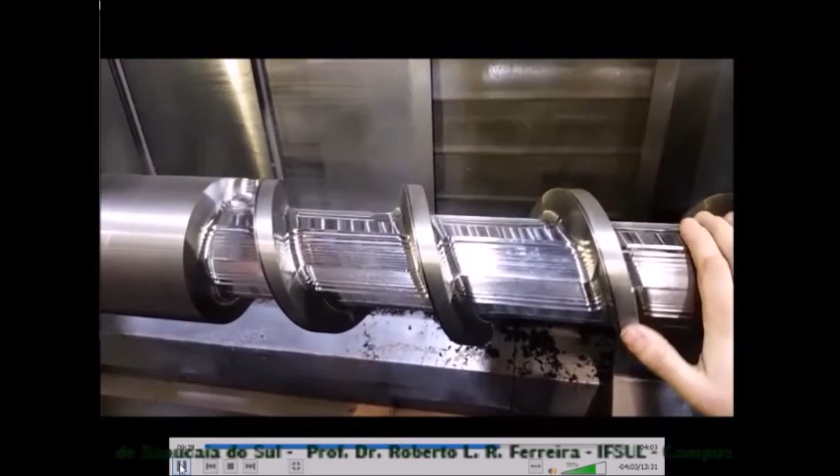Okay, the easy part is done. Got it nicely roughed out. Most of the material is out. Did it in 4 different setups, 90 degrees apart. Very rigid. And now the hard part.

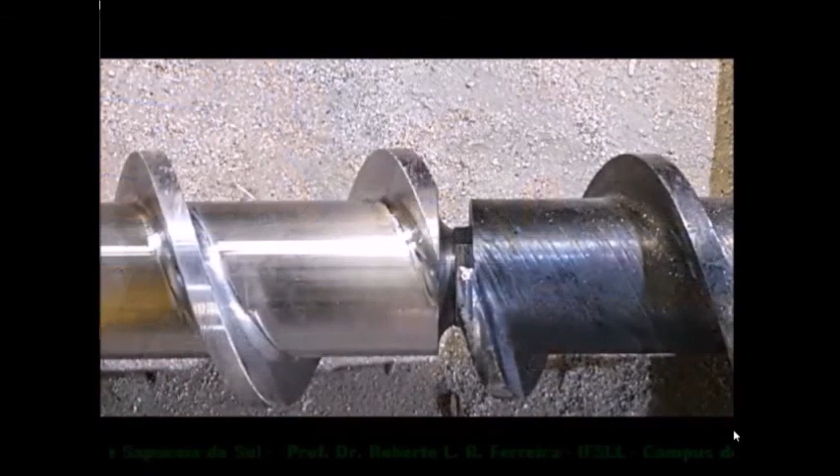Screw during polishing. Estão realizando o polimento da rosca toda agora.

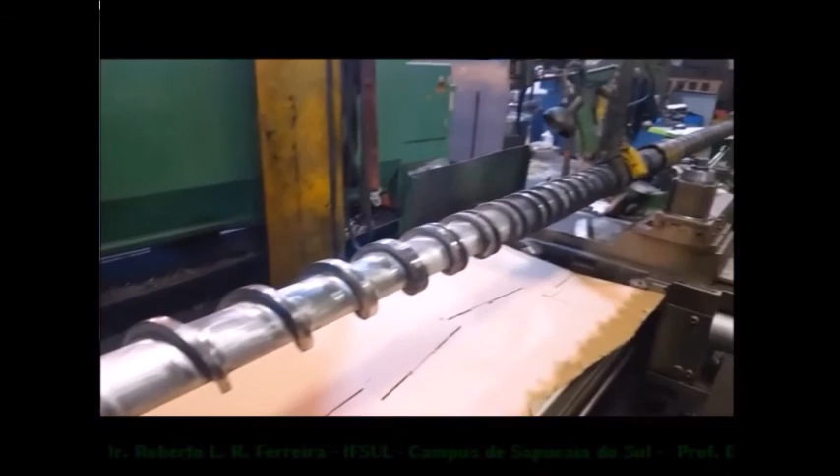After welding. Many hours to go. Hand polishing.